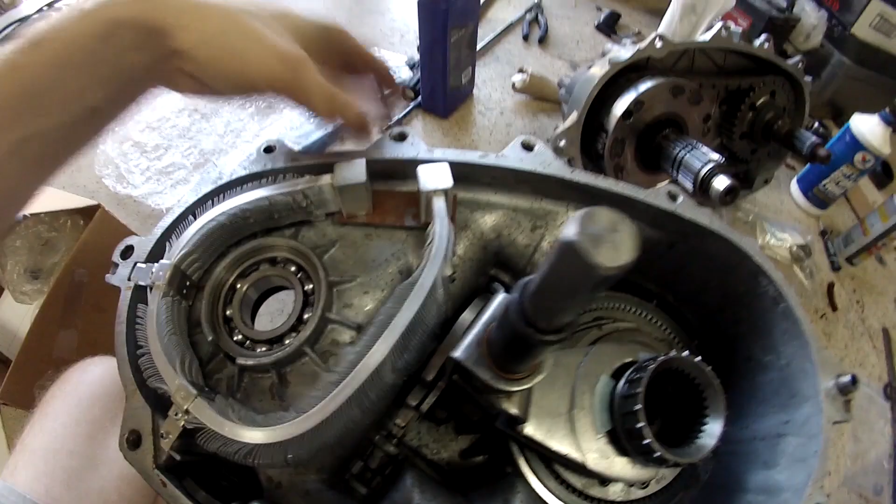There, boom, cooling loop installed. Today we're taking apart a T-case because I had the vampire issue for a 1995 H1 Hummer with 6.5 naturally aspirated engine. My issue upon opening this, and you probably can't see it in this light, here's a cooling loop. I have the older style cooling loop, found out.

Anyway, on the older styles, they were installed at the factory wrong, AM General, not GM. I believe they were torqued, and it would cause stress to one of these two joints. And in my case, once it got too much heat from a drive, it ended up cracking, and you're not gonna see it. There's a hair crack right at the tip, right there. It goes all the way down there.

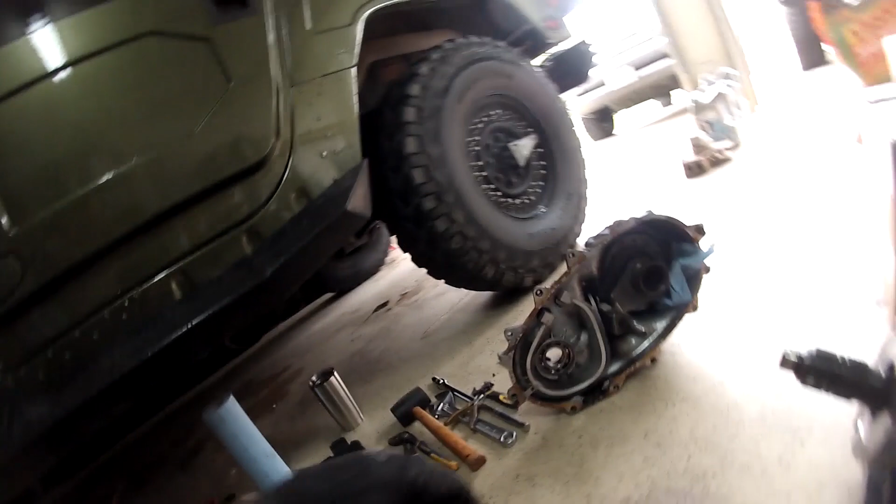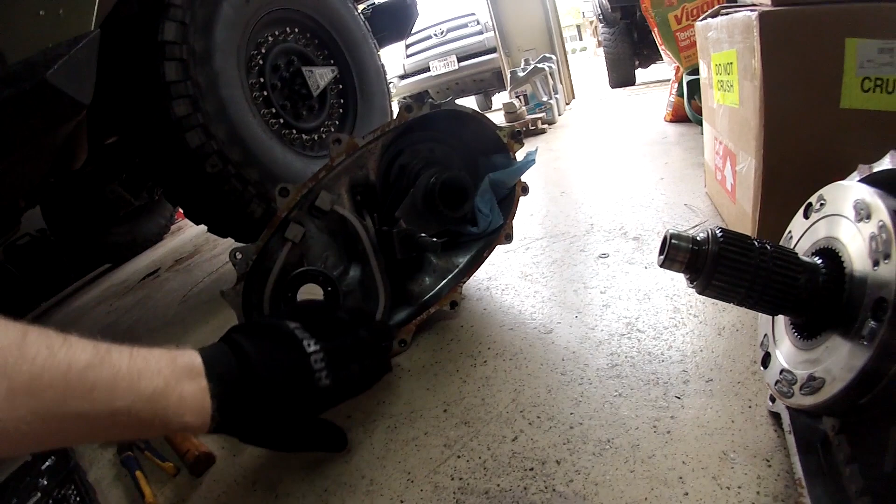What happens is, the way the transmission T-case works in terms of cooling, the fluid goes through the transmission and it comes into this cooling loop and it goes through here. When the T-case is running cool, your transmission is usually going to be running hot because you're not using your T-case as much. So in here, the fluid, staying contained, goes through here, cools off a little bit and goes whoop, right back out into your transmission. And then the alternate is true.

When you're off-roading, you're using your T-case more, you're using glow lock, anything like that. This is hotter and your transmission is cooler. The fluid goes through here. This helps to cool the T-case. Pretty neat idea. This is the only real problem where, not installed correctly, torqued the wrong way, it causes stress, and eventually too much heat builds up and causes this little guy to fracture.

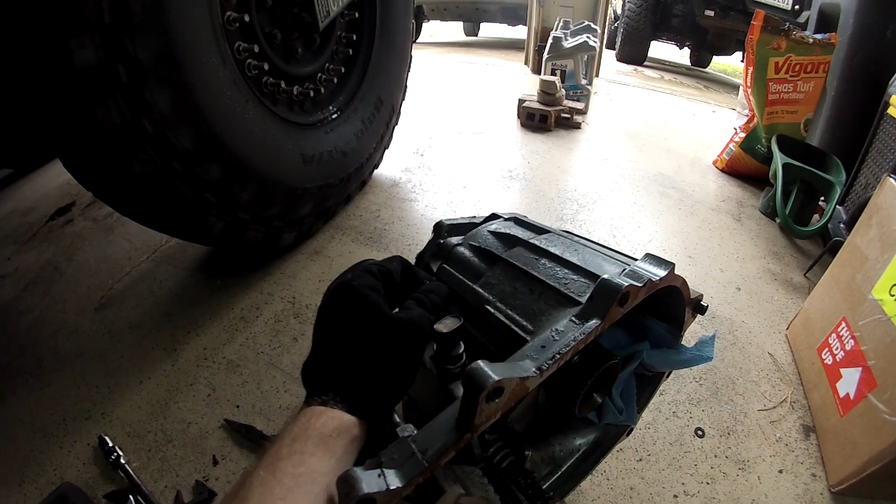So what happens is this fluid, which is supposed to be coming through here, all happy and self-contained, instead starts dumping into all of the fluid that's supposed to be passing through into the T-case. When that happens, this overflows, which is supposed to be 2.5 liters. There's an air port here, so air can come in and out as it fluctuates. Heat and everything causes things to expand and contract.

What would happen is it would start transporting transmission fluid out. Well, where do you think an air port goes? It goes into your air filter, so you can get transmission fluid into your air filter. You can get transmission fluid into your geared hubs as it starts following the lines that go to all the air ports in every part of the vehicle. So you'd get transmission fluid in all the places where you don't want it, and this would overflow.

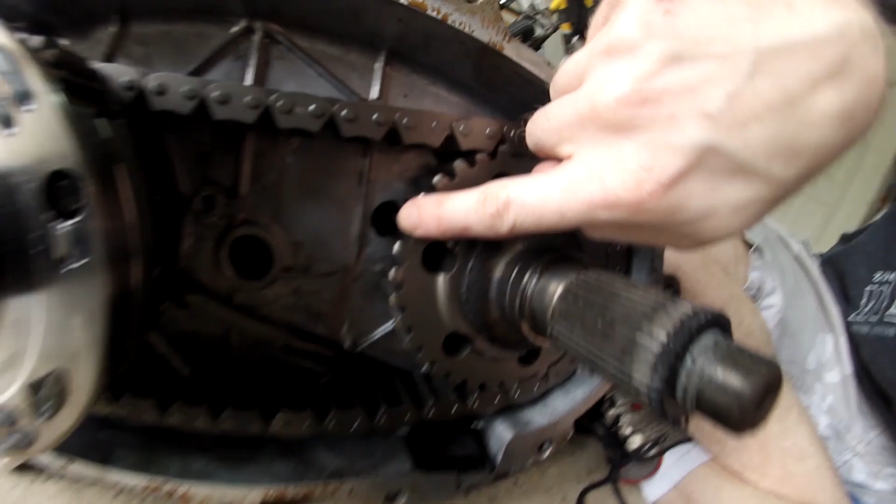So what we're doing to the transfer case is we're rebuilding it. You see on this side, these gears, they don't have any kind of broken teeth. They have normal wear. Everything is spinning and turning as it's supposed to. There was not a lot of metal in the T-case when I opened it up, so that was good. There was just a little bit, but not much. We're worried that some of the stuff could have melted off and gotten into the bearings and seals. So that would cause the bearings to wear prematurely.

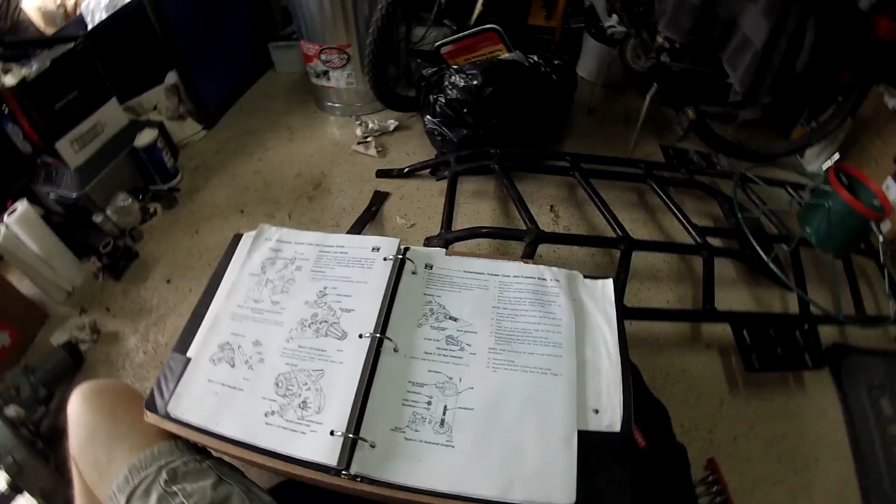Step one is that we gotta take off the yoke, and boom, yoke's done. All right, next is we need to take off the rear extension on the rear facing side of the T-case, which is what I'm holding in my right hand right there. And I found out it is 15mm bolts that are holding these guys on. I'm assuming they're gonna be kind of tight. And so we're gonna put this on with a nice short extension, well, it's kind of longer. We're gonna take these off. Let's see if I can do this.

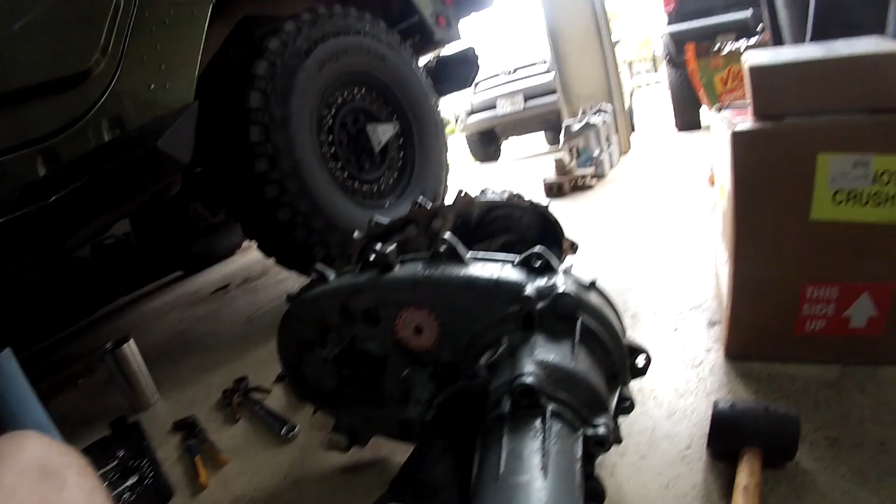I already took apart the T-case. I took it apart in half. That was easy. The yoke was easy to get off too. Let's get this done. Once you get the 15mm bolts out, you just give it a love tap with a rubber mallet. I read in this manual, it said to find just a soft tip, just anything to put in the edge. Give it a tap. I just gave it a nice tap and magically it came off. So we're just gonna pull it off.

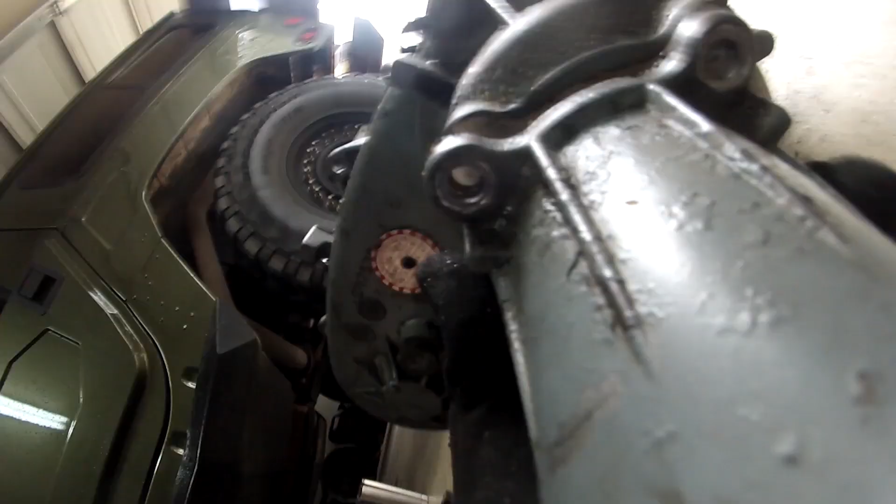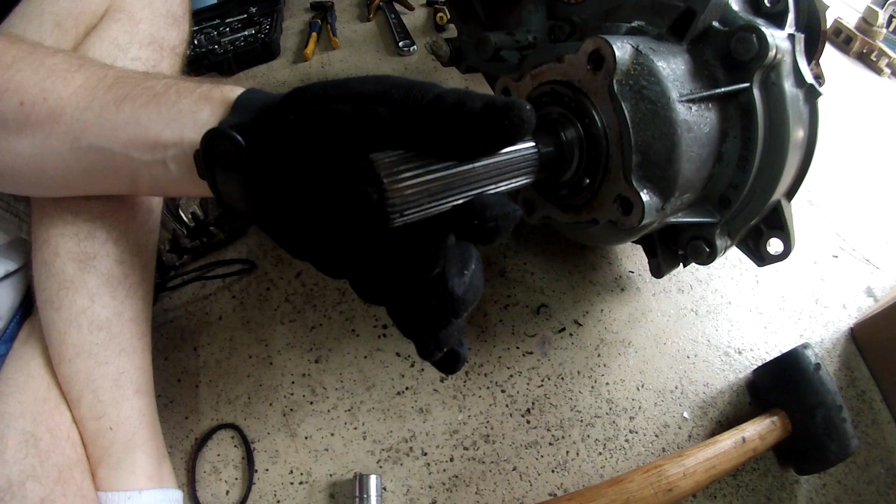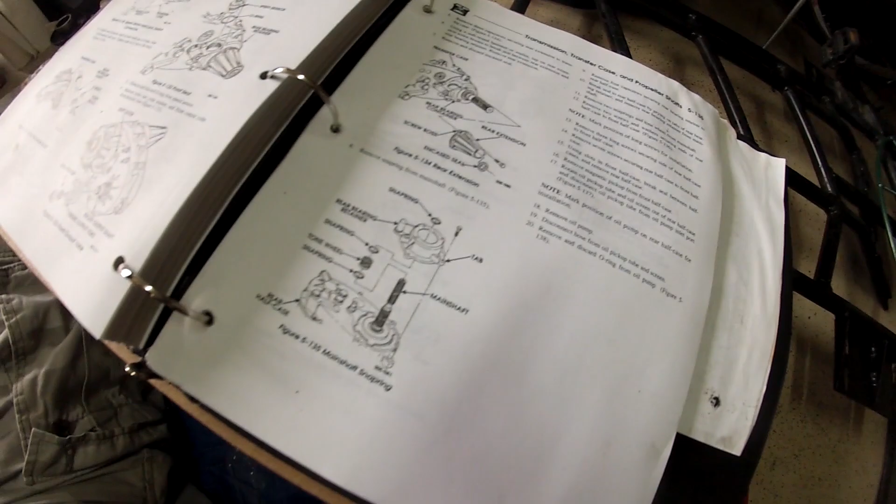And now we have, what is this called? This is the main shaft. The main shaft's right there, it turns everything, it's very important. Because it's very important, let's try not to put it on the concrete more than we have to. The next step is we're taking off that, which looks kind of daunting, the rear bearing retainer, which goes over the main shaft, which is right here.

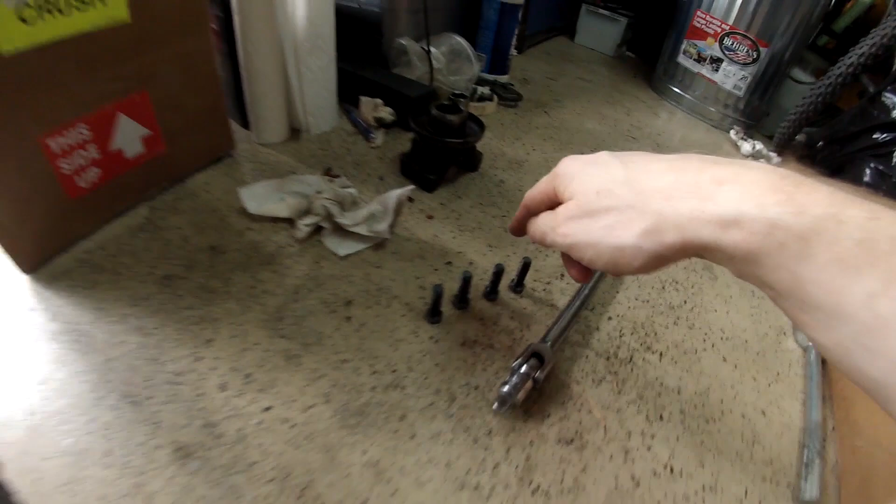So my guess, these are probably, again, well, these look a little bigger. We got these bolts out of the rear bearing retainer. Bolt out, there are 4, they're all right here. They were 15 millimeters. And as you can see, I already gave it a love tap, so it's already started. I might need a screwdriver, I'm not sure, to help pry it the rest of the way off. But it looks like I should be able to wiggle and jiggle it and get it off.

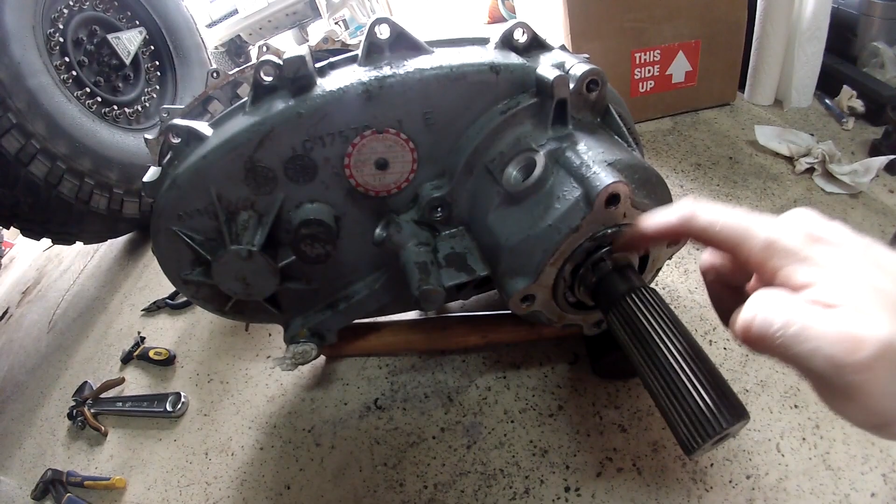And then we got to worry about the main shaft. It shows lots of snap rings and tone wheels and more snap rings, and pretty much this entire thing is just a whole bunch of snap rings from everything I've read. In further investigation, there is a snap ring hidden right here. We got to take this guy off to pull this unit off.

Okay, once you get this cover off, the rear bearing cover, then we get down here, there is a snap ring that will be right in front of this tone wheel, which is what this is called. So as you can see, I've already pulled off the snap ring, so it's got a little bit of movement, a little bit of play. I don't think it's gonna come off immediately though. And there's a snap ring right behind it as well, which we have to get off.

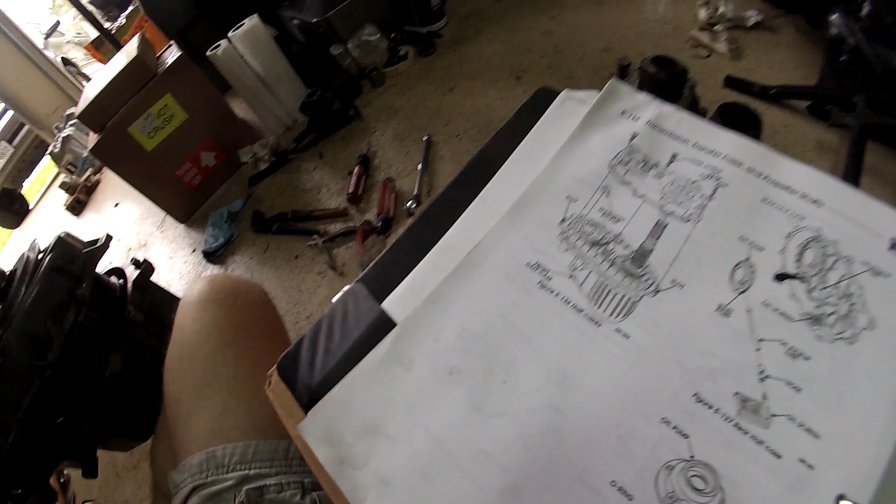Next up, I'm on 5136. You see how they take off the rear half of the case, separate from front half, and the front half has all the guts. So I've put it all sort of back together. I've already taken off the rear half, but I want you to be able to see how I take it off. Camera there for a second.

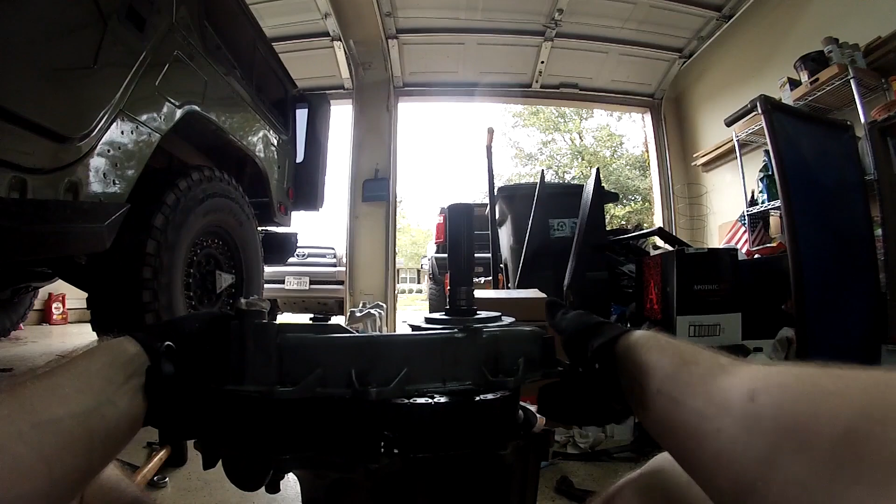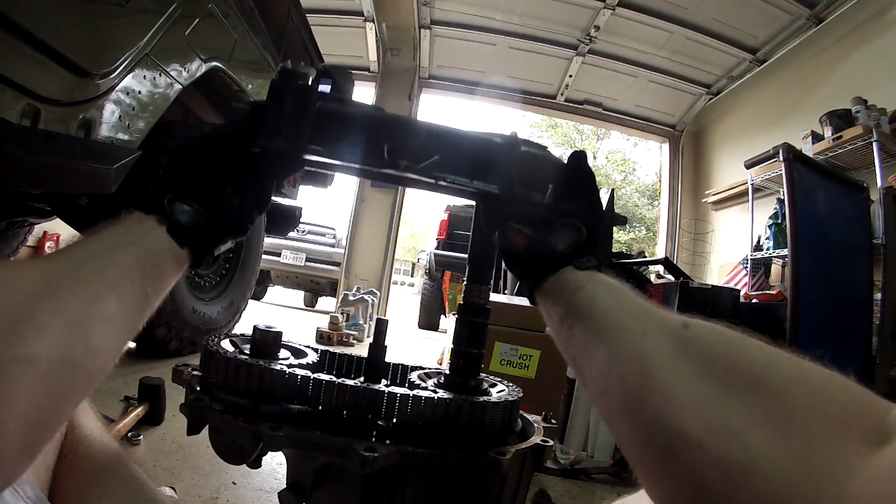All right, so this has the oil pump on it. It slides off once you get that last snap ring, and it just comes up like this. And so you have the front half, and okay, in here is there, that comes out pretty fast. And then there's this guy where the oil pump goes on, so it circulates the fluid inside the T-case. So rear half is over there, front half is now here.

Just remember, it's one big Lego, people. Just a Lego. Keep telling yourself that. It's just a Lego.

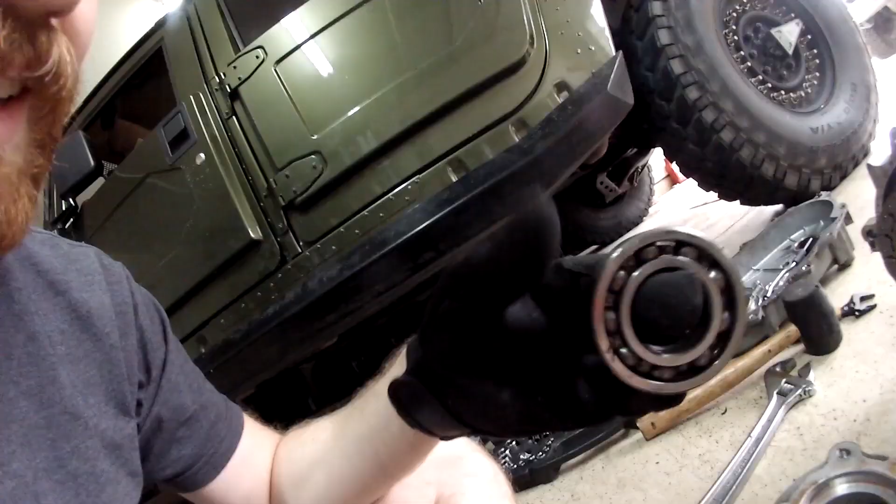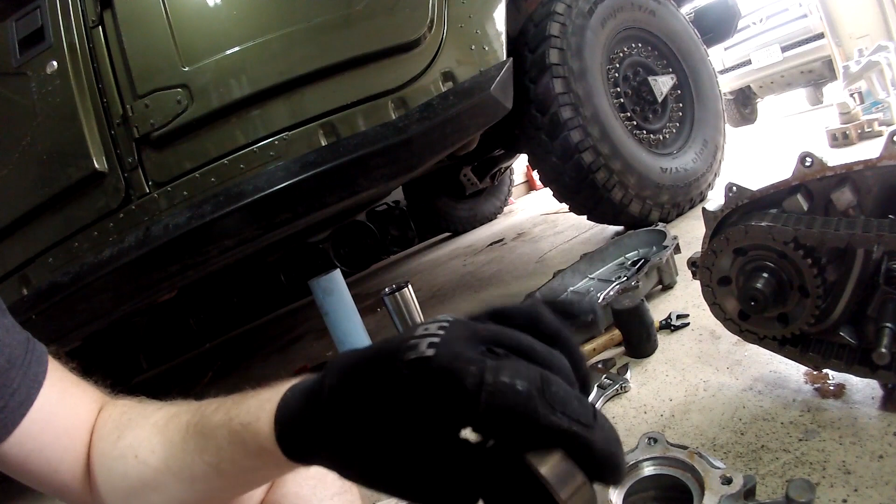So I just took out the rear bearing and the rear bearing housing, and I can actually feel it hanging up, and I don't know if you can hear it, but you can hear it catching on crud that's on the inside of there. It also had a little bit of crud just sitting on the outside of the bearing. So I'm glad we're replacing the rear bearing. That probably would have failed at some point and started making noise and probably causing damage.

That's done. I'm gonna clean out the inside of this. Just put a little bit of oil, transmission oil, of course, to lubricate it up a little bit to press in the new bearing. I just seated the new bearing. It's wonderful. It goes around nice and smooth. Use a bearing tool and a hammer. Takes some work, not easy, but not tough. You guys can do it.

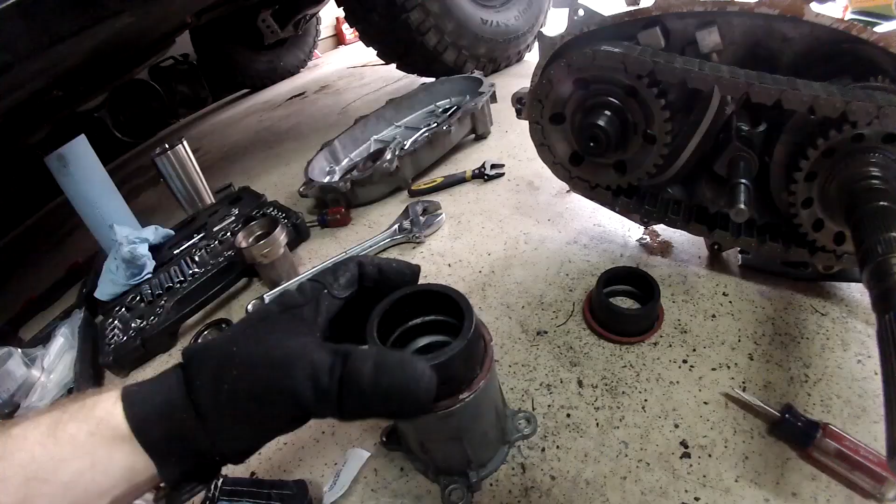Just took out the rear bushing extension. You can see it's kind of torn up. Just take a hammer. As long as you don't damage the rear housing, I don't think it's a problem. So this is the old one. There's the new one, and I'm just gonna really carefully and lightly tap this in with a rubber mallet. Be careful, obviously this is aluminum or something like that, so we don't want to damage it like we did when taking it out, which doesn't matter, but putting it in, you need to be gentle. Boom, new one in. As you can see, it's nice and flush, it's not damaged.

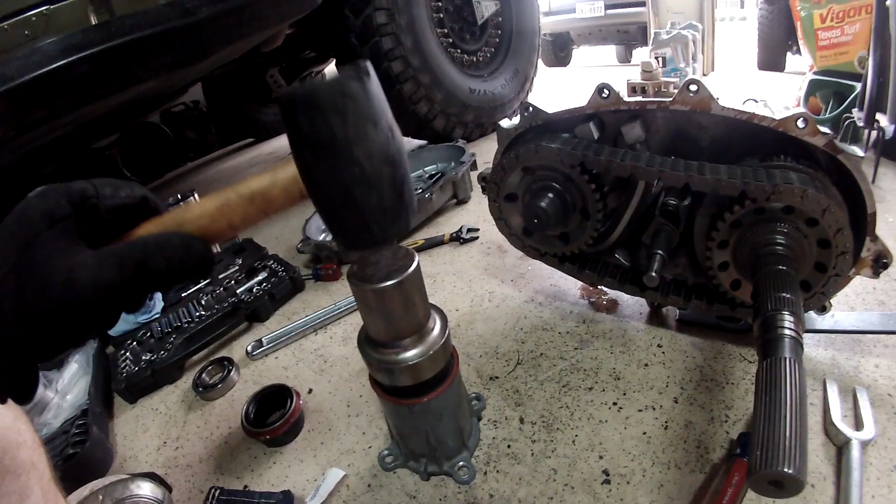Actually, I just took this press guy, I pushed it right down on top. I don't want to do it again because I don't want to push on this rubber too many times, and I used a rubber mallet and just gently tapped it in. It went right in there pretty easily. I mean, you can't wiggle it out or anything like that. You can't force it out by hand, but it's in there, so that worked.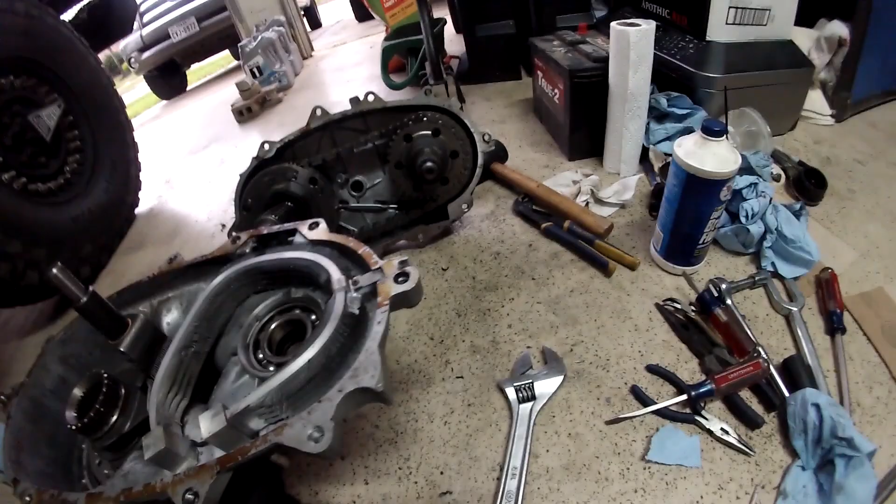Okay, removing the cooling loop. So first we take the bolts off down here, loosen them up. They weren't that difficult. And the cooling loop has a couple other aspects to get it up. Okay, let's put these bolts to the side. And you can see that just kind of sits right in there. So I'm gonna wiggle it, jiggle it, see if I can pull this out on camera.

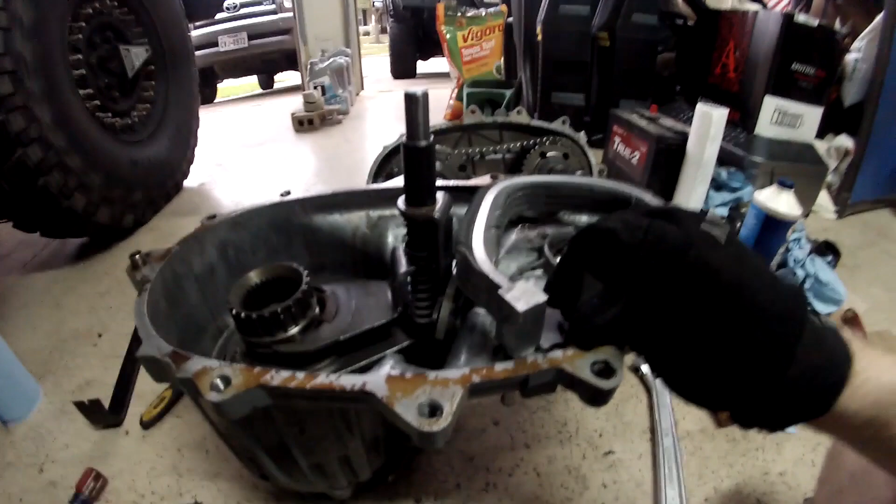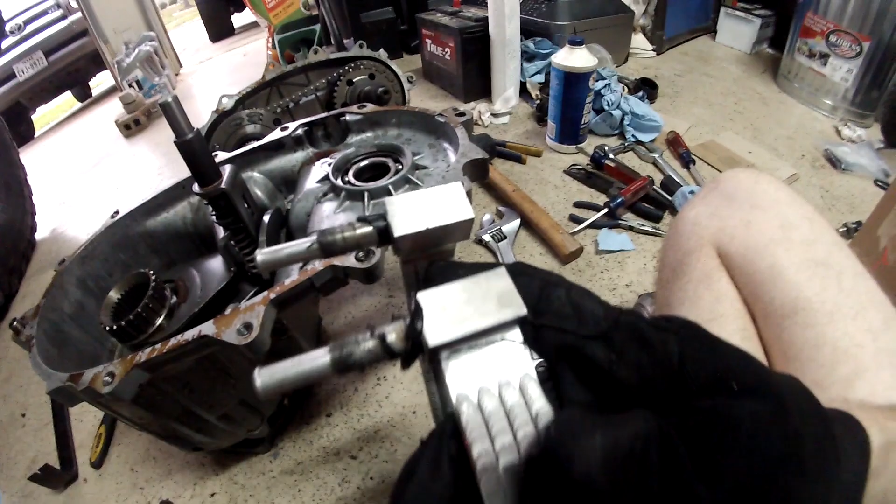Alright, since it was broken anyway. However, we torqued it enough, you can now see how bad the crack was. I don't even think it was from my torquing it that did this, but you see that right there? That is where all the fluid came out and went into my T-case. That crack right there. It's pretty cool actually. That's not good, but it's pretty cool to actually see it. So we know what it looks like.

Alright, so we're going to replace it and not manhandle it like we just did this one. And we also have to replace that bearing right there. The shifting fork, it says in here to remove the shift rail followed by the mode fork assembly. Shift rail, mode fork assembly. Alright, so I've already got this started because it took a little bit to figure it out, but you can turn with a wrench the shifting fork itself.

But this little knob that sticks out right there is sticking in right there, and I noticed that there was just enough space to pull it up by shifting a little bit without really having to do anything to hurt it. And so that comes right up. If I remember right, because I had to take this apart and do it again twice to figure it out. I'm gonna move this down. Then, here we go again. Okay, I'm gonna hold the camera kind of funky.

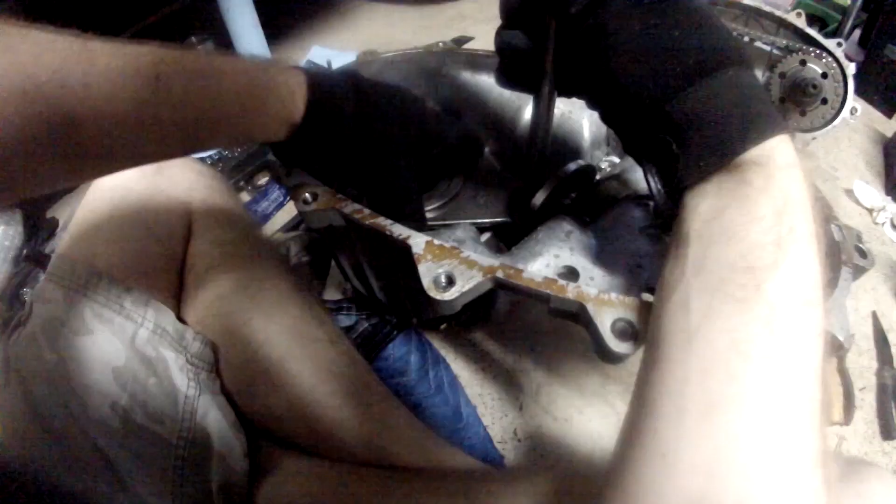Pull up this fork here. Got the shift fork out, assembly. I'm just gonna say you just wiggle it a whole bunch and eventually you get it out. And it looks like this. It sits in there like so. You just wiggle, and you pull it out. It's not that easy, but it does come apart in two pieces. Let me set it down right here. You can see my coffee and everything sitting around me.

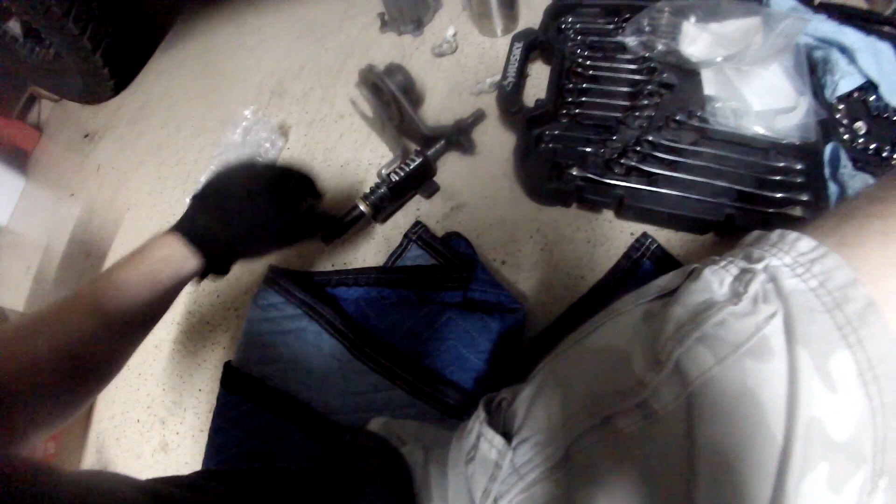You see how I'm pulling that right there? That whole section that's moving comes off. So I took that off first, and then the lower portion just slid right off. I'm holding it all together with my hand. I took it apart already, so you can see how it comes off without me struggling to get it.

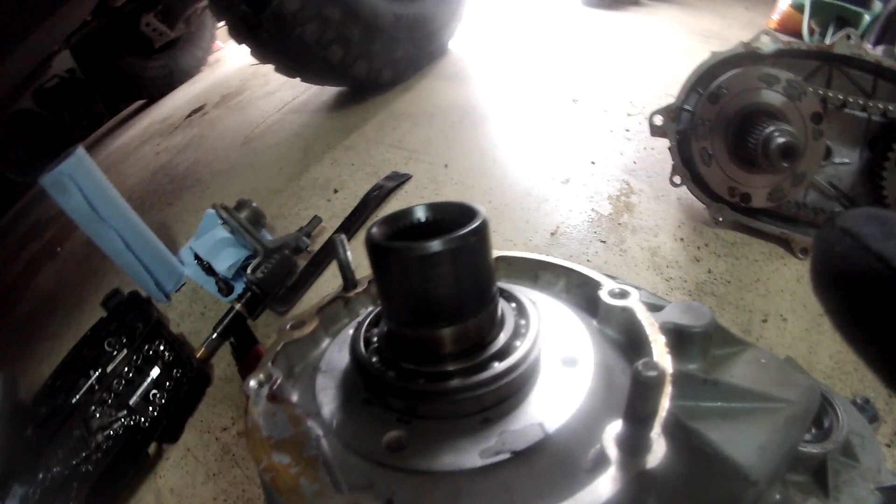The last bit that you need to do is this bearing would typically be seated down right there. There's a snap ring that goes right above this bearing. I already took it off, and it'd probably be helpful to put your hand under this. It's pretty heavy though. You pull out this whole gearing out of the inside. I'll set that right there. This bearing, you'd pop this out, replace that, and you have the entire half.

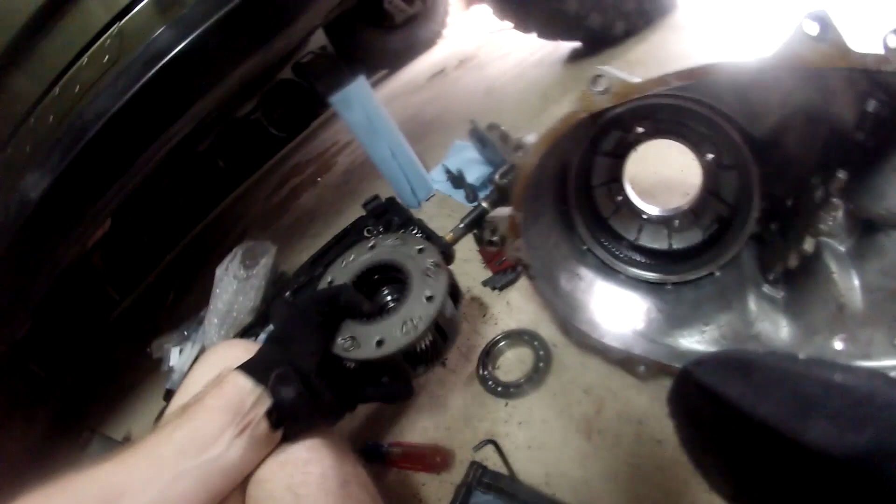This bearing, I already installed it. That's all good. And that output seal, that's already installed. So really, this bearing's the last one. Down at the very bottom here, there's a bearing. Gotta figure out how to take that out and replace that. Anyway, almost done with the replacing of bearings.

So it's pretty cool. On the differential assembly, which is this guy, which was sitting right in here, there's a snap ring. Whoop. If I can grab it, already popped it off. Then I'm guessing that, oh, all right, let's work this off. I think we can do this together. Okay, get this out, be nice and careful, set that on a clean paper towel. All right, so looking in there, and we'll set this aside, and look back over here. We're getting closer. You gotta figure out how to get this guy out still.

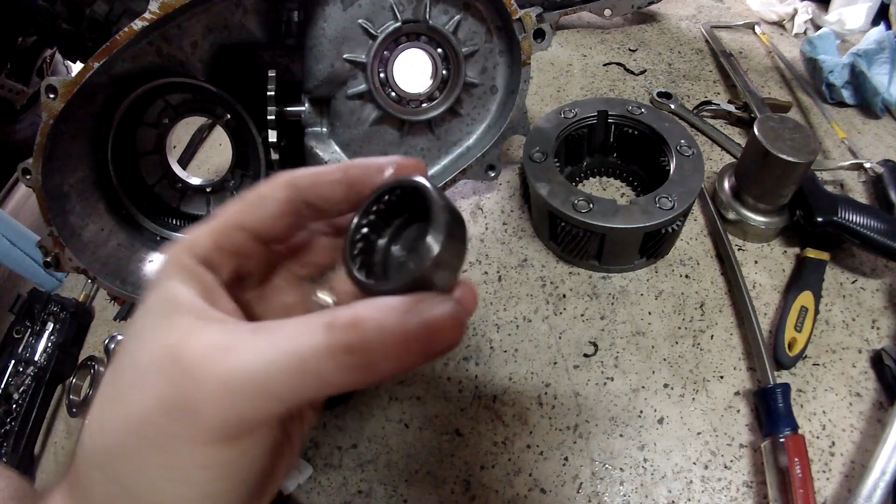So I figured out how to get that little bitty bearing out of here. You just need some kind of long punch with not a pointy end. Just put it down there and gently give it a couple taps, and boop, right out it comes. So there it is, and we have a replacement for this. As you can see, there's kind of some crud in there. We're gonna clean this guy up because this is going back in. Clean this up, put in a new bearing, and then we start the assembly process. We actually have all the bearings done.

And the very last thing I'll show you is the cooling loop, which will go here. So here's where the cooling loop goes. And the new cooling loop has a blue band, there we go, on it, right here. That'll tell you that's the new one, circa 2001. Anyway, you just take that band off. These are on here to protect it.

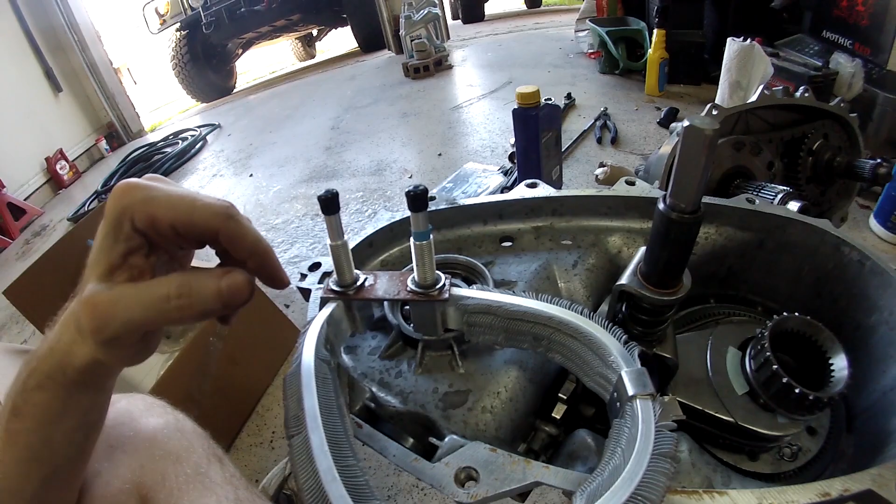These all stay on. These little O-rings with a washer on it. It's pretty cool. I'm just gonna leave those little rubber stoppers in on there as I put this in, just to protect the ends. I don't want them bumping around. Gently let that go in, and then line this guy up to lock that in. That's fine. Don't push or pull on this. We're just gonna let it sit there and do what it wants to do. Everything else on here is good. There, boom, cooling loop installed.